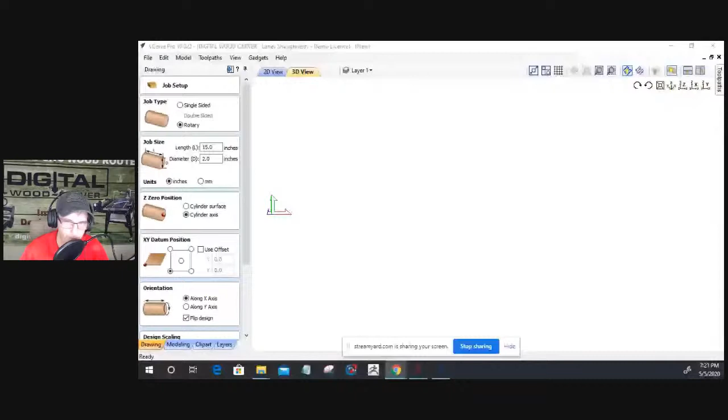Then we're going to actually transition into Aspire to make the project for this, because there's some modeling tools involved, some modeling involved in stuff.

Oh, I got the hiccups and I don't know why. Why did they start on me?

All right, so let's go ahead and click hide here. For this project here, of course, we're going to click rotary and let's get maximized up there. We're going to click rotary, we're going to do a rotary job.

On the rotary job, we're going to go with a 15-inch length, and I'm just going to make a small project. I cut a piece of walnut, 2 inches by 2 inches by 15. So we'll go 15, and on the diameter, the diameter of my blank is 2 inches by 2 inches.

But let me jump out of this for a second and see if I can illustrate this a little bit better, because this is important. If I were to draw a 2 by 2 block here, and if I were to true up a cylinder out of this 2 by 2...

If I were to say that my diameter was 2 inches by 2 inches, well what I would end up with is a flat here, here, here, and here. When it's truing up and rounding this up, I'm going to end up with 4 flats. It's not going to be a true round.

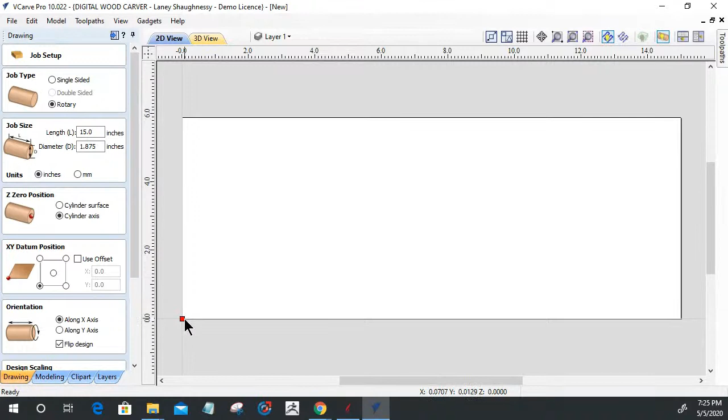Now, with the XY datum, we always zero out on the front edge of our cylinder stock, so it's the bottom left corner. For the setup, let me draw this out - 1.875 by 1.875, square for right now. Bear with me, hang tight, and you'll see where I'm getting at.

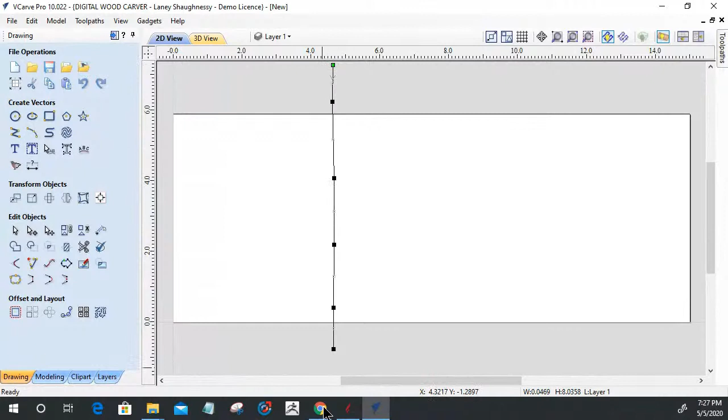If I were to take this and unwrap it into this flat drawing area, that piece would be split right on one of the faces, right in the center, and unwrapped in a fashion like this - let me illustrate. You go there, stop, you go here, and let's grab these and move them down here. Pretend along with me - grab this and wrap it up here. So when you unwrap that cylinder into a flat plane, it's basically taking it from the side of that block. Let's get that back together here.

On our digital wood carver units, for most of you, your fourth axis may be mounted on the table, with your router overhead. Let me draw a router here to simulate this. I'm going to select all these and center them up, then hit G on my keyboard to group those together. So let's pretend this is our router. When you center your router over your stock, you're centering it over the center of your piece, and the router stays at that orientation, traveling back and forth as the fourth axis part rotates, depending on what needs to be done.

Similarly, with the digital wood carver, our unit is mounted off to the side. So our Y axis, which is the router up and down when in fourth axis mode, we would center that bit onto the center of our stock, our flat. That's a representation of this lower left hand corner, because if I were to wrap this up into a cube, this seam and this seam up here would meet in the middle here. And that's our A axis.

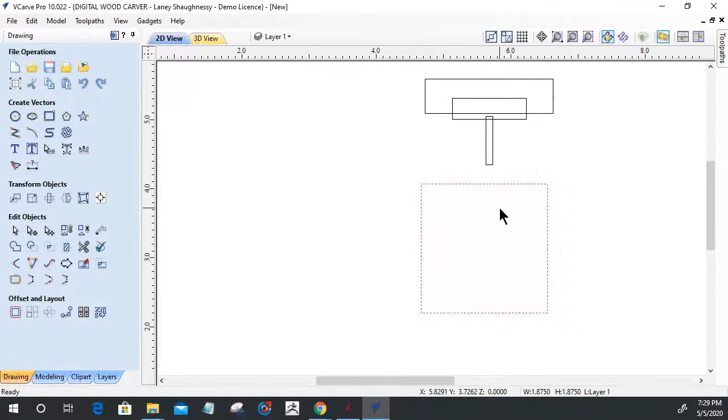So when we Y0 - keep this in mind, whether you are off to the side like the digital wood carver, or overhead, your Y0 is the flat face facing the router bit. It's not a corner or anything like that, the flat face. Same thing for the digital wood carver folks - that flat face facing the bit, nice and parallel, perpendicular to the table, 90 degrees to the unit table. That is Y0. And then X0 is at the leading end of your stock. You guys and girls with me on that so far?

You good? All right, now let's get back to our job setup here. We want to zero off on the bottom left corner. That means all the way towards the head end of our material and at the center of that block or round part or whatever you got.

Now, for the orientation, on the digital wood carver, we wrap our y-axis along our x - and I believe Dave Gatton does as well. His router is overhead, and he changes his y-axis from the router moving side to side to the rotary, so therefore he wraps the y value around the x. Same thing we do with our digital wood carvers. This is the option to use. Now, some machines where the fourth axis might go along the y-axis, and their y-axis travels back and forth along the cylinder, and their x is what turns the cylinder - then they would wrap the x values along the y-axis.

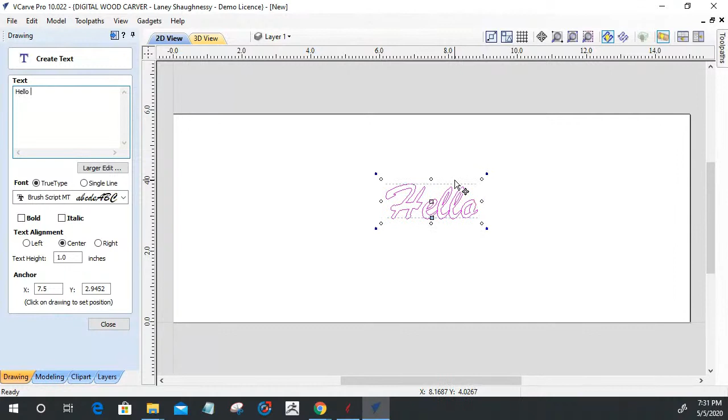So whether we were V carving something in our cylinder, let's say I was saying hello world. Let's weld that because we got overlapping lines, right? We don't want that. So we're going to weld that together and replace it with our nice welded text.

But if I were carving this, let's do a VCarve toolpath, 0 flat depth, 60-degree V-bit. Very simply calculate it. Let's unwrap this so it looks like our flat plane here for a second. If I wrap this cylinder up, it's wrapping that Y value up and down, and that's hard to make the mouse go around this white block, but imagine it's going around this white block. We would wrap it around that X axis.

All right, let my mouse stop there. Let that regenerate. Catch up to me, Vectric, so we can just move along nice and smooth.

Now, the same goes for if I had this turned 90 degrees. I'm going to undo that, and go Control C, Control V to make a copy, then rotate that 90 degrees so that I can size it down. Let's say that I was having it wrap around the cylinder, and if I were to V-carve that, calculate.

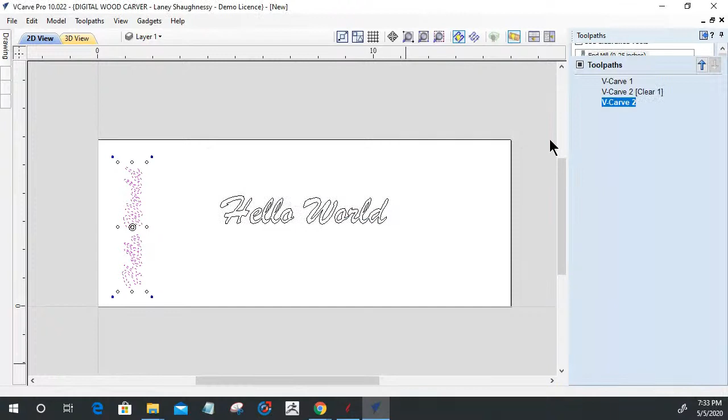Oh, I had an end mill in there. It shouldn't have been in there. If I were to wrap that around, so in our flat plane, it wraps around.

Let this regenerate. Catch up to me, Vectric. You can do it. Every time you move a wrap job, it takes a second for it to regenerate. But now, as I rotate, I'll use these two icons up here. As I rotate the part, that hello world is getting wrapped around the cylinder.

So if I were to unwrap this, it looks like that, but it's wrapping around.

So when we're doing cool things like this, which I'm not doing tonight, we might do a project on it. Somebody had asked a long time ago about making a kind of design relief, like a rolling pin for the kitchen that has little designs on it. When you roll it over dough, it cuts out those designs, like a little cookie cutter. I've made holiday ones in the past, and we might do a project like that one day when we circle back around to the fourth axis. But we're not doing that tonight.

Whatever design or process we're doing, whatever we carve is going to get wrapped around that cylinder.

Now, same thing with models, okay? Let's say that I had a cylinder here and I wanted to just go to my clip art gallery, and see what we've got as soon as Vectric catches up with me. Let's say we throw the duck on here, the flying duck.

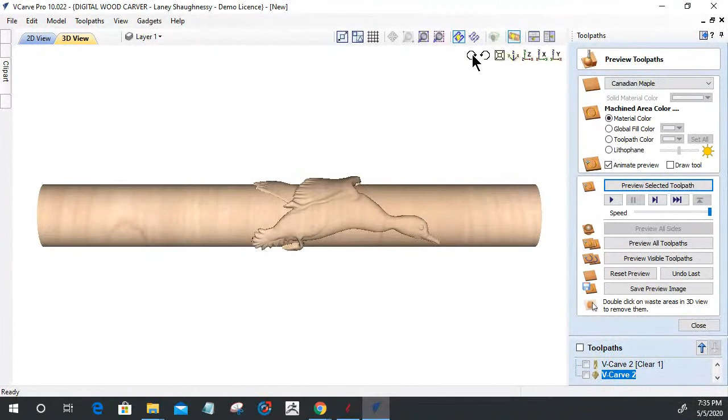Regenerate for me there, duck, duck, goose. It takes a second for all the pixels to catch up to regenerate. There we go, it'd be wrapping that duck around that fourth axis. So it's wrapping it around that fourth axis.

So we could make all kinds of cool stuff, little totem poles or whatever the case may be. They don't have to necessarily be little, but we would do that and everything. So whether we're working with a model that's going to be carved around our cylinder, you got to make sure the model's got height to it, right?

So you got to make sure your cylinder thickness can accommodate the height of that model, or else you end up with little pencil stick thin results.

Here, I'll give you an example. Let's say that my material setup here was not 1.875, let's say it was 1 inch in diameter and everything. Click OK on that and let it regenerate. Let's say that I wrap that around - I'm going to have a little hole pencil thin. Let's close out of this and turn off this. I'd have a little pencil thick, 1 inch diameter, because part of that 1 inch is my model, not just the diameter of the cylinder in the middle, but the dowel, if you want to call it that, but the model too.

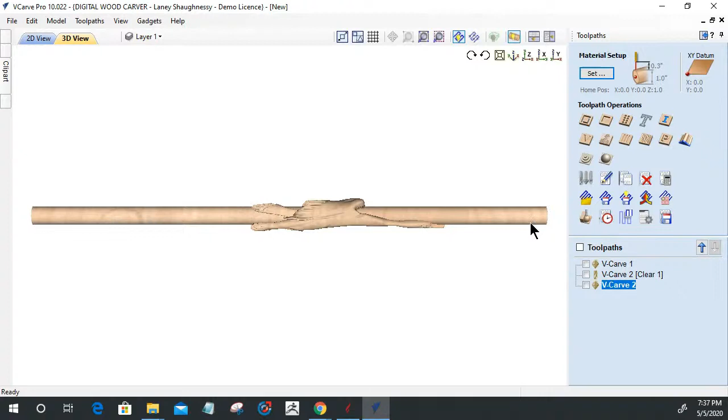So from the highest point of the model to the center is going to be half that diameter. So you got to make sure your stock is big enough, because, man, unless you're making a Harry Potter wand or something, I don't know what this would be for - it wouldn't be for anything. But you want to make sure that your stock diameter can accommodate the model, right?

Now I'm going to be bringing in - let's get back to our job setup here, and let's change this back to the 1.875. And I'm going to actually be bringing in a third party model file into VCarve Pro. Now, in VCarve Pro, I can't create a model from scratch, but I can import models from the clip art gallery, or I can import a third party model file into my project, and that's what I want to do - import a model into here, so let's go do that.

So we're going to go into the modeling tab. We're going to go import model or 3D component, and I'm going to grab this one 3D object here and let it import in.

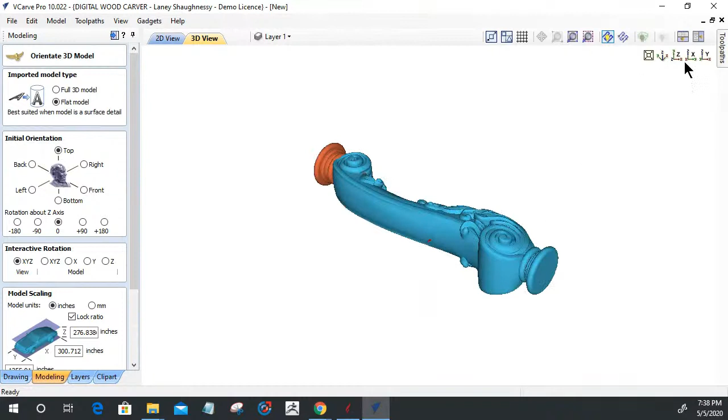Now, when you import a 3D model into the software, I don't know if you can see that little red speck right here that my mouse is circling around - well, that's my material. This is the model. That little speck is my material, right?

Well, if we look at our model here, we're going to be bringing in the full 3D model. Okay, and now if we look at this blue outline here, this is basically outlining a cylinder, like this model inside of a cylinder. However, that little red speck right there in the middle of the cylinder, that's my project piece, right?

So I need to first of all initially orientate the model, because this particular model, if I were to be looking at it here, it might have come into the software facing this way - it could be facing this way, right? So it's like I got this big old wheel of a cylinder that I'm going to be carving this leg sideways out of, which would not do. It could come in any way - it all depends on how the creator created it, right?

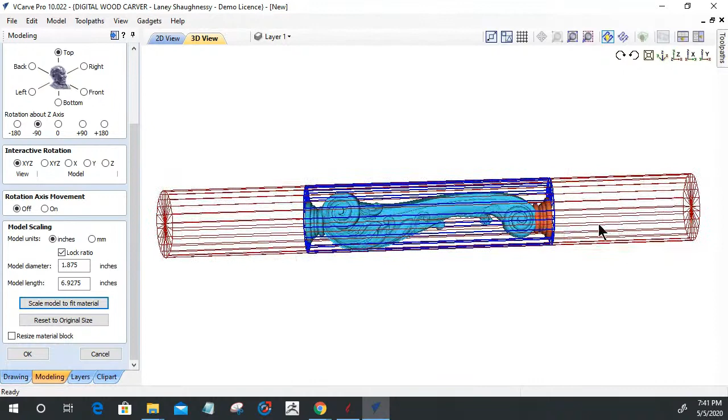So if I wanted a full 15-inch leg, I'm going to have to jack up the diameter of my stock. There's no ifs, ands, or buts about it - I'm just gonna have to do it. I could probably stretch this out. So let's see here, model length.

If I said 15 inches, let it regenerate that, and it's keeping the aspect ratio. So as I zoom that in, now I need at least a 4.5 inch diameter piece of stock, 4 1/4 is fine too, but I need that to fit this model and all.

If I would have reset the original size and then scale model to fit material, so it scales it appropriately down. If I would have unlocked the aspect ratio and made this 15 inches, well, that table leg is going to get distorted to accommodate for that, and that distortion may not be appropriate for what we want. So it's very important that you gauge what you're carving based on the size of the material.

So let's reset that size to original, get it back to its original size, and then scale model to fit material. And then, since I am working with a 2x2 here, I'm actually going to resize my material block. So I'm going to check off that box to resize my material block for that piece of material. When I click OK, it'll do that automatically.

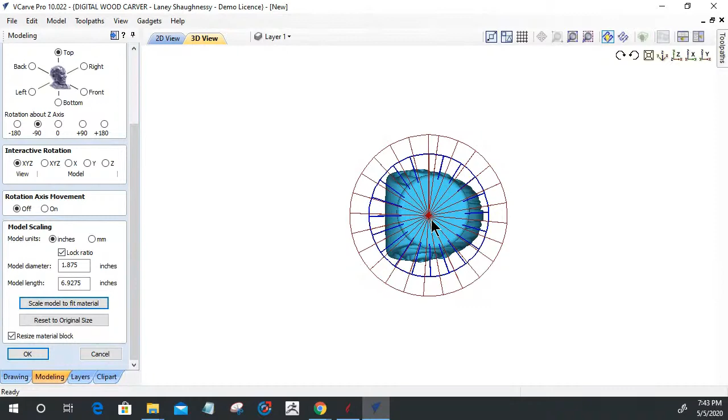And sometimes, whether it's this end or the other end, let me flip this around to the other end, spin around there. We may need to adjust center on our cylinder, because that center axis, there's a red line.

There's a virtual red bar running through here, and let's get back into a Z orientation, kind of looking down here. And if I rotate this interactively, I'll go interactive along the Z axis.

I could pivot this part, right? So here's that virtual red center, right? That's our center of our cylinder right there. Well, sometimes parts come in funky, so it's up to us to make sure that we get them centered appropriately. And this wouldn't be centered appropriately, right?

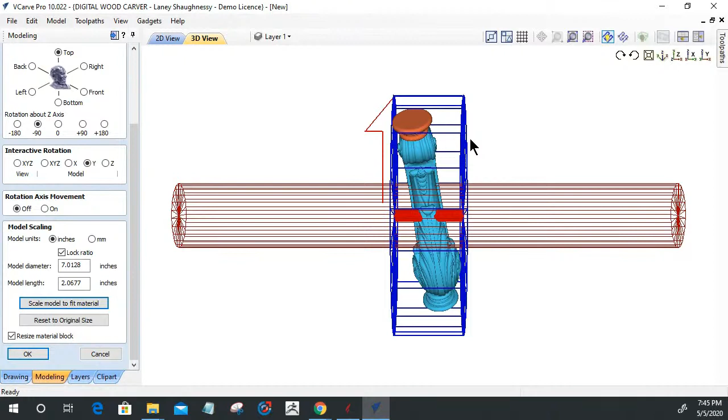So we need to do this interactively. Z is kind of this up and down pivot, so I'm just kind of pivoting it within this cylinder of the stock. Y rotation allows me to swing this thing around - right now I'm going diagonal because I'm not in an orientation. And then X is a rotation.

Okay, so let's get back to our Z orientation here, and let's basically get back to our original size. Get back into a top view for a second - I'm bringing it back to its original state and scaling to fit the material.

Let's talk about this Z. So let's say that my model was not quite centered - well, it's up to me to appropriately fix that. I'm just dragging my mouse up... I went too far, I overshot it, but I want to try to do my best to center the piece.

Now I can change my angle. So if I look at it from the X axis here, as I'm moving that Z, my mouse up and down, I'm pivoting that piece on its center axis. Oh, I'm sorry, I'm going the wrong direction - left and right. So it's my goal to get that center virtual line running down the center. I want to move this to the right, left and right. I don't know why I was going up and down a minute ago, but I want to get that the best I can to center.

Okay, and so now on the X, I might need to rotate the part. So the X is rotating - are you going to turn for me there, dude, so I can show them? If I move my mouse to that left or right orientation, now I'm kind of rotating the part inside that center.

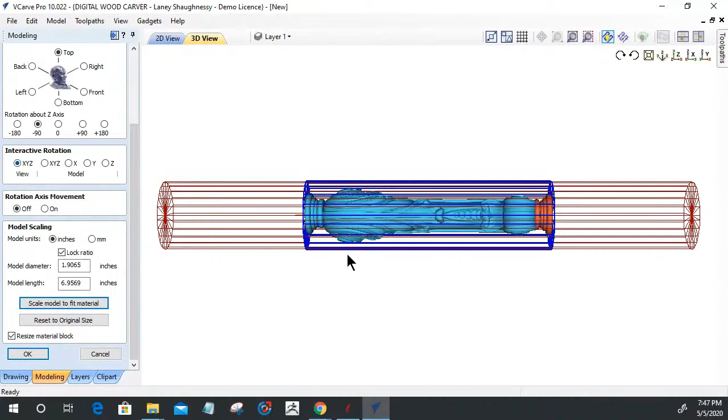Now, if I were to get out of interactive, I go back to view here. If I were to rotate this around, what my goal is, last time I'll say this, is to make sure that I'm centered. Now, if you see that red, let me see if I can zoom into that.

You see that red right here? That's my cylinder center, right? So I'm not appropriate because when this thing mills away, remember, I got a live center in each edge. So when this mills away, we're going to be a little shy on this end.

So what I need to do is get this set up, and it's kind of weird how we have to orientate this. I need to come in on my Z axis rotation, look at it down the X axis. I want to rotate it 180 degrees around, so I've got to actually do that manually.

Oh Lord have mercy, see what happens when you're interactive, it's rotating on that. I wanted to rotate the view around, not the actual Z. So let's get this set back up appropriately here.

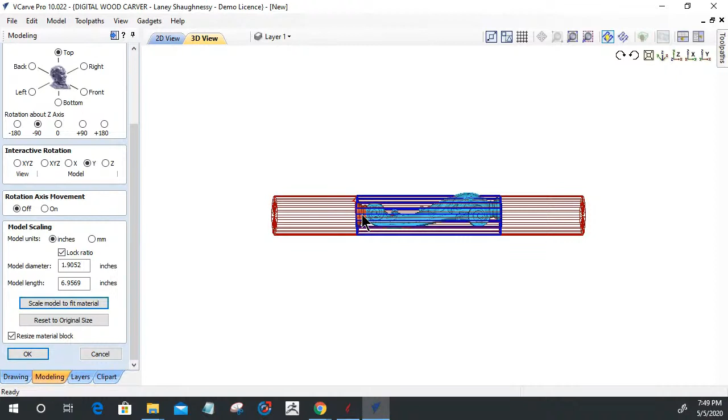I'm pretty much centered there, but now I need to bring it down to the center here. So on my Y... oops, overshot a little bit, right about there. Stop. All right, and so I've got my two ends centered.

Oh dadgummit, I just don't move. You gotta not click your mouse in the screen if you're still in the interactive stage. So let me get this back up where it belongs. All right, now get out of that interactive state there.

Fairly centered on that end. Let's look how we're doing on the other end. Pretty good there as far as the center goes. And right, if we go in here, we see a little bit of our red rod.

That's because this leg curves inward, and there's nothing we can do about that. It's just there's nothing we can do. So we're going to resize the material block.

Let's get back into a Z orientation. We got it orientated properly. And we're going to go ahead and click OK, and that's going to bring our model in.

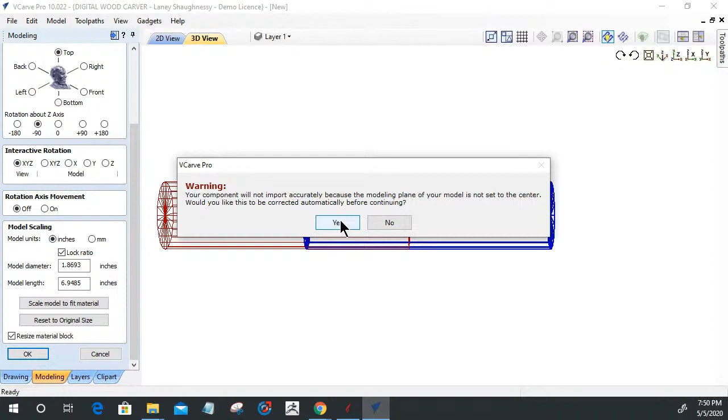Now what's going to happen is when it brings it in, because I'm resizing the material block, it's going to resize. Your component will not import accurately because the modeling plane of your model is not set to the center. Would you like to correct this automatically before continuing? Yes, I would. Set it for me on the center and click no because I have toolpaths in there.

And that's an unwrapped view. Let's wrap this bad boy up here for a second. But the software realized that I wasn't quite centered on my axis, so it said, hey, you want us to do it automatically for you, get you squared away? I'm like, sure, why not.

All right, so it did. It brought it in and it centered it for me and everything on that new size. Now this is our table leg. Imagine that rod running right through the middle here, right at this dip here. Part of that rod is going to be coming through to the center here because this end here is offset.

from this one. So if I come into kind of a Z view straight up and down, and if I were to rotate this to its side a little bit more, you can see that my center line here and the center here is off center. It's off, so you would see part of that red coming through and everything, and that's appropriate. So center to center, you just gotta - it's all about the orientation when you're bringing the models in and everything.

Now this is a wrapped view. Let's unwrap the view and look at what it looks like in a flat view that we're kind of creating the toolpath. Here's our 2D view, a little grayscale image, right? 3D view, it's our flat plane.

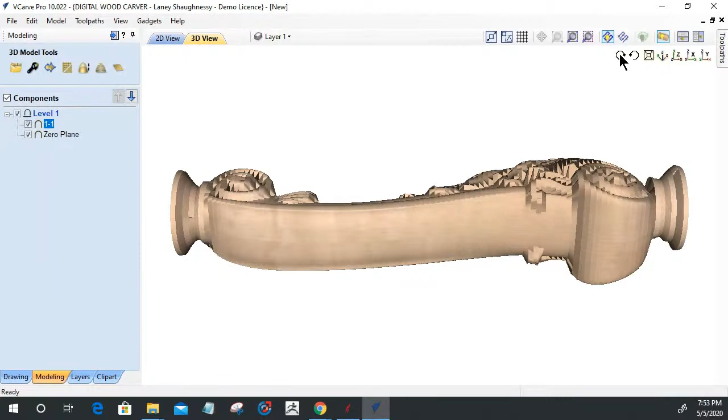Remember, like I said, our red shaft was showing, so it's all hollow up here. But on the back side, when this is wrapped, there's a seam on this. And if we turn this, I'll show you where the seam is. So let's come back here. That's the front. Let's go all the way around, all the way around, all the way around.

See if my seam's on... I think it's on the other side, and I just zipped right past it here. Bear with me a second. It is, because I'm a goofball. Let's get back around there.

There we go, barely see it, but there's our seam. That's where our two ends come together to form this seam right down the middle. You can see a little bit of it right about here and everything.

It's all about how you orientate the model. Whether I'm doing a 3D model like this, or taking a piece of clip art and wrapping it around my cylinder, or engraving on a pin with V carving, it's all wrapping. We are wrapping these models in a 360-degree orientation. We draw in a flat orientation, but we're wrapping that Y value - remember, up and down is Y - around that X. When it wraps around, it creates that cylinder.

Now, if I were 3D carving this model, once everything is laid out and positioned and ready to go, and it looks good in the flat view - I don't want to carve any V carving over here, but I could carve some text on the back of this leg if I wanted to - I'm ready to start creating some tool paths.

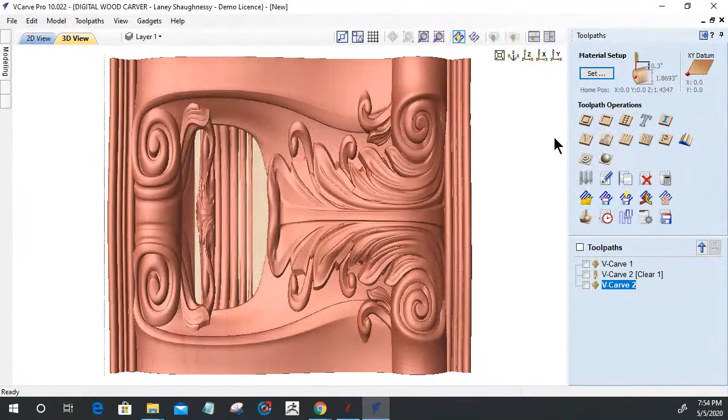Now, in the tool paths, let me delete these three so we don't get confused with those hello world toolpaths I made earlier. When we're working with a 3D model, just like if it was a flat board, we have 3D rough and 3D finish - our two toolpaths.

If I had a 2D toolpath, such as a V-carve of a graphic image wrapped on a cylinder, and I was carving hello world on these flat areas or anywhere on this model, it's very important when I calculate this 2D toolpath that I project the toolpath onto the 3D model. I check that before I click calculate, because we need the carving to flow with the curves of the model.

There's nothing really scientific about the fourth axis. It's all in the setup - how to zero out your machine in the fourth axis and bring it in. Where it gets fun is when we actually have the ability to create models from scratch and things like that.

A lot of people with that fourth axis want that ability, and I make table legs - I go on eBay, Etsy, Turbo Squid. There's all kinds of places to get 3D models of table legs. eBay is a great place to find unique table legs and balusters and all kinds of things. That's where this model happened to come from. I can bring these models in, calculate the toolpaths, and carve them all day long.

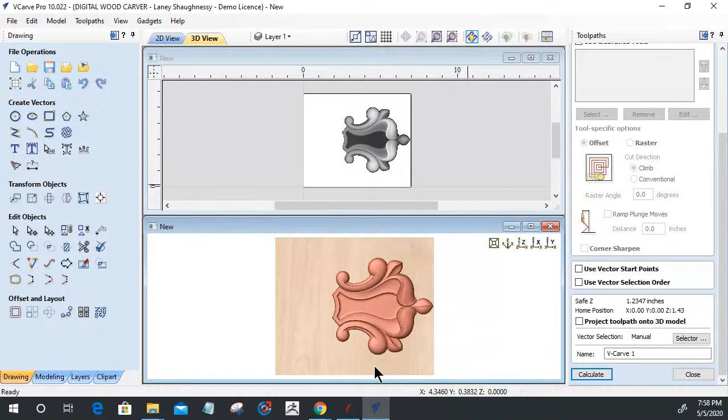And of course I hit rotate, grab the right blocks there, the white block sizer. Let's get that sized about like that, and get this pulled up here. Then I'm going to go into my drawing tools and align up and down, center, get it centered. So from there, let's split our view so we can see what's happening here. Let's go into our clip art and see what else we've got.

Let's say that we want to throw this in there. And let's hit the number 9 key twice. Excuse me, go back to our drawing tab and align that to center.

All right, cool beans. Now I want these two models to interact. I want them to merge, so they're merging with one another, right? Just like they are. If I were to click in here, it merges with that.

All right, let's go into our clip art. Let's see what else we got here. Let's grab this bad boy.

You can drag them into 2D or 3D view. All right, let's go ahead and hit number 9 on the keyboard.

Let's rotate him. Actually, I want to keep going all the way around. I want the small end at the bottom. You're going to hear these dinging sounds because the model's got to catch up to itself before you can rotate. So let's get that one more time. There we go.

And let's size this model down appropriately. I'm actually going to take this model here and squish it a little bit, so we're going to squish that in.

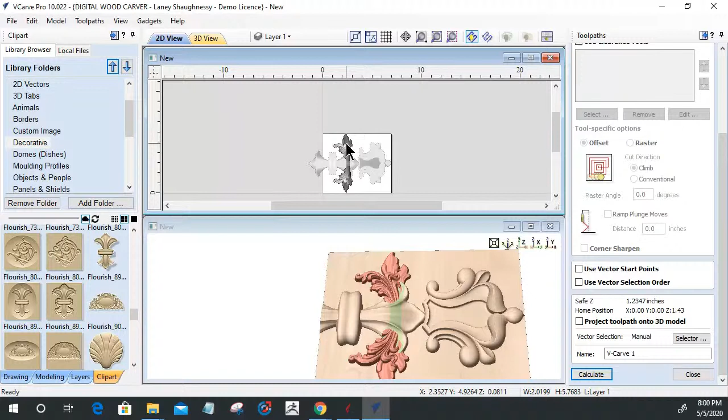I'm going to grab this flourish, pull him up, get him in there. And this guy, let's squish him in a little bit, because I've only got a 15-inch piece. And I'm just using this as an example.

All righty, Aphrodite. Now let's maximize this. And so let's say that I wrap this up, right? Nothing there, right? It's all squished. It's like, well, wait a minute, what in the heck happened there?

Well, you can't just throw models on a flat plane that has no thickness to it. We need our stock underneath, and that's a zero plane. So in our modeling toolpath here, we have a zero plane with no height to it, but we need to add some height to it. So in our zero plane, we need to give that diameter, that meat.

So currently, as it stands, with my three flourishes, my zero plane has no base height to it right now. So if I look at my overall model height, let's maximize this out. You see how it's all skinny? That's why it wrapped up.

So I'm going to pull this up and pull this out. I want the model on the outside of my zero plane. I want it on the top of it, if you will. I want it wrapping around that zero plane. This zero plane is going to wrap around like a...

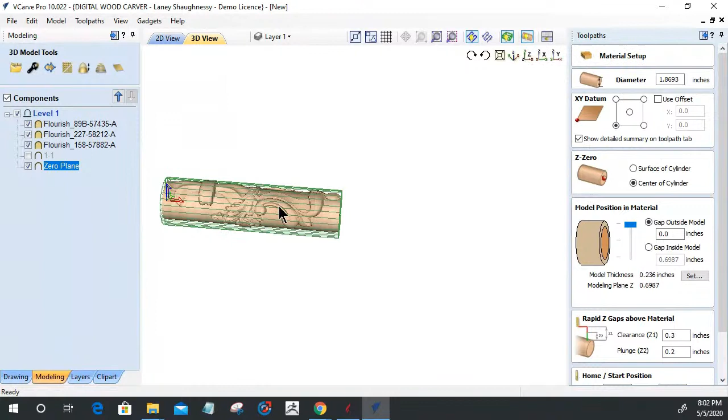Let's get this in the middle of the screen. Work with me there. Come on over here. Come on, come on. All right, let's drag it over. So we need that model to wrap around that cylinder and everything.

And so right now, my current model thickness, not my Z plane, but my model thickness, is 0.236. That's these guys here, all these models I just dropped in there. The highest, from the bottom to the highest part, is 0.236. Now with the Z plane and everything, that toilet paper roll, not counting the hollow center, it's 0.6987, for a total of 1.8693.

So it kind of built up the diameter that I'm going to need for this model. But you know what, my stock is 1.875. So I've got to change it.

I've got to come in here and go, all right, so 1.8693, this number here, minus... no, I'm sorry, minus 1.875 equals...

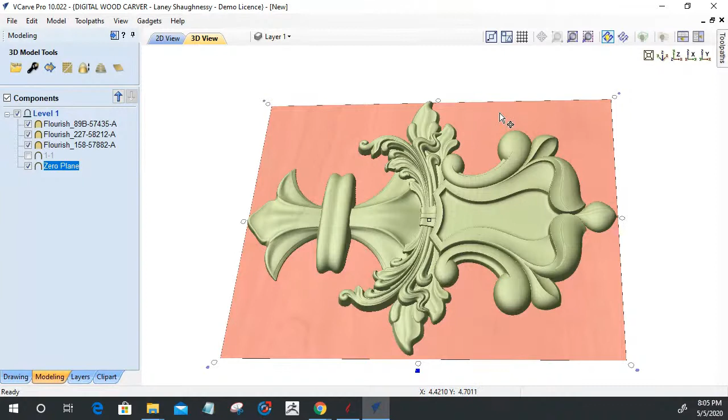Let's get back into full view here and unwrap this bad boy. So now we've got our appropriately sized model, and I could build any kind of model that I wanted to create, some kind of unique spindle or table leg or whatever, whatever rotary axis and everything. And so this would all wrap around and it would look probably pretty cool, you know?

And the thing of it is, in here I can't build the model in a way that would allow me to remove some material. I can't remove material like I can in Aspire. In Aspire, I'd be able to draw a vector around these models and say remove everything that is outside of that model, and it would remove all this model material of my cylinder here, giving me the opportunity to kind of form and build something like that corbel leg we saw at first. So if I turn this cylinder off for a second...

Turn all that off, come on. And turn the zero plane off, don't need a zero plane when we have a table leg and all. And now on this guy right here, it's like, man, he got fat, just eating his cake, right?

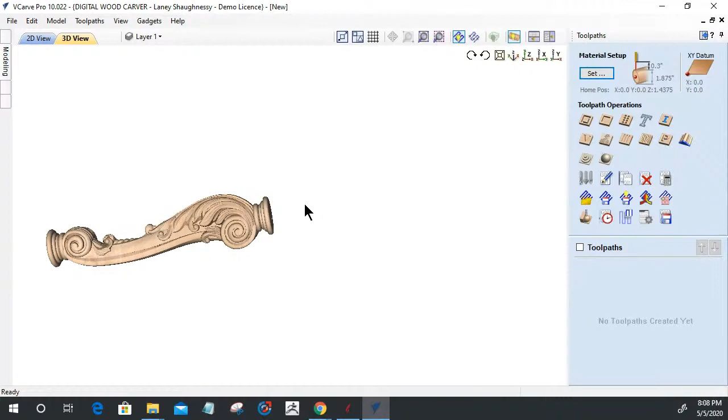These negative sides here, where we're below our center line, that material would have to be removed, and I just don't have the ability to kind of sculpt and do that in VCarve Pro. But man, I don't really need that ability. There's so many different models I can bring in and work with, the sky's the limit. But for those of you that have Desktop and Pro, you can do everything I've been doing here: bring in models, V-carve, create little patterns for cookie cutters and things like that. But if you want the ability, aside from dropping in models and creating your own cylinder, to sculpt your own leg or profile, that would be an Aspire thing. I'm not saying run out and buy Aspire tomorrow, I'm just saying you got to understand there's limitations on what you can and cannot do.

So let's say we were doing a cookie cutter pattern. Let's come in here, turn off all the models, get back to our blank board, front and center there. Let's get back into our drawing tab, close our alignment tool. Let's say I was doing a bunch of Christmas stars. So, 35, 35 — that star looks good to me.

All right, let's get a little bit of an array going here. I'm going to drag this down right about there, and use my array tool. I want 6 columns, let's go 12 rows, with a gap between point to point and point to point — let's go with a 3/8 inch, 0.375 inch gap. We don't want to waste too much dough, right? But let's click copy and see what we got there.

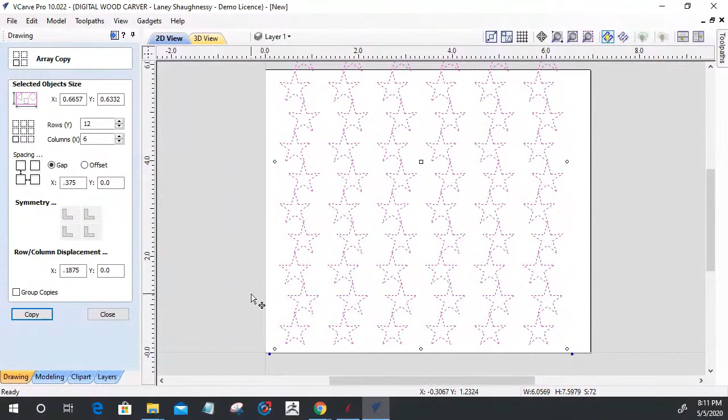I should just measure my star, but close enough. All right, so now I've got my pattern here, but these exceeded the 12 rows, exceeded that. So we'll go ahead and get rid of that. And then what I'm going to do is take this and center it onto my material.

If I want the stars to be pockets, where it kind of has the little stars raised in the dough, I would simply V-carve these with a flat depth. If I wanted to cut out the stars, I would need to do a reverse of this by putting a boundary around it. So we'll do a little bit of both.

So if I were to V-carve this, let's just do the stars first. V-carve, flat depth. I don't want a very deep depth because I don't want dough stuck up in my rolling pin that I have to pick out of all the stars and points. So we want a very shallow kind of depth, enough to make that impression, whatever it might be.

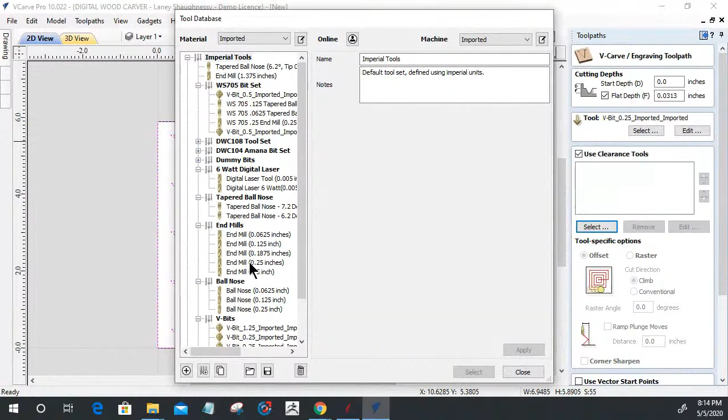And I would calculate that. If I reset this preview, let's unwrap this for a second and preview the visible toolpath. That's going to go around and carve all these stars where they're raised up. Think of raviolis and things like that. There's all kinds of little patterns you can find online that you can use.

But now, I didn't offset my rectangle, I didn't bring it all the way to the edge, so I have these little lips here, and that's no good because those lips will show up in my cutter. So I need to offset this outward a small amount. I'll go a 16th of an inch outward, delete the original, and then recalculate that toolpath one more time, because I need that bit to clean up those edges for me.

And that way, when I wrap this bad boy up, it's there, and now when I'm rolling this, it's making this indentation impression with all of these stars. So there's all kinds of cool patterns.

I think even, let's see, if I open up a tab, let's see how good Google is to us. If I were to type in... let's see, Christmas cookie cutter patterns. This is an example, it doesn't have to be Christmassy.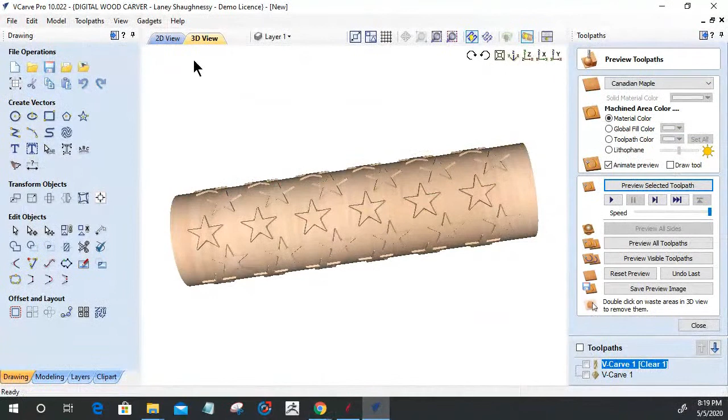Now I've spent enough time showing how you could create vectors. Of course this was just a little generic pattern, I just threw some stars in there, but you could have some fun making patterns. We could come in, in clip art, let's see here, texture area tiles. Let's see what we have under texture area. I don't think I have anything in my texture areas right now, probably not in my VCarve Pro, I'll show them to you in that. But sometimes your textures, and I don't have all the models that you guys and girls have, but there's all kinds of brick textures, all kinds of textures you might be able to use. Typically though you're kind of drawing them yourselves.

Now let's get into tonight's project. This was not tonight's project. Tonight's project, we are going to make a basket weave bowl kind of looking thing out of that big old slab of wood, so it's going to look something like that when it's all said and done. I'm going to show you how we make this from scratch.

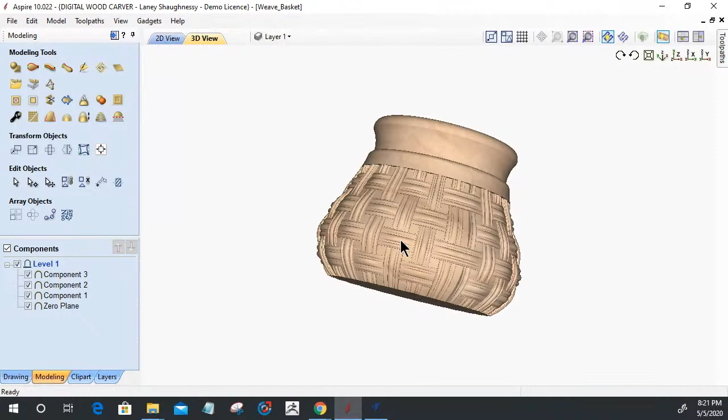Now I'm thinking about actually taking this and putting it on the bandsaw when it's done, cutting this part loose and making a lid that sits on top. Then if I cut this lid off at the bandsaw, this part right here should fit under my CNC so I could actually mill out some of the inside to hollow it out. If not, I'd have to be creative, I could use a Forstner bit and just hog out the waste material in there and do some fine sanding. I could use rotary tools, I could use all kinds of things. I could take it to a lathe and chuck it up, but I won't be able to hollow it out on the fourth axis - I'll have to hollow it out on the table, lathe, by hand, some way or another. So it's going to be a solid block that looks like this.

And then it'll get cut down. But I'm going to show you how we make this weave pattern, show you how to do weaving and all that stuff. So we are switching over to Aspire for this, okay? And for those of you that don't have Aspire, please stick with us, because learning how to draw vectors or create patterns and stuff, you might find it useful. So in this particular project here, let's go back to our job setup. This job setup is a rotary job, it's 4 3/4 inches in length.

Okay, that's because I'm chucking this bad boy up on its side like that. 4 3/4 - and look at the size of my hand, that's a big old chunk of wood right there. But 4 3/4 from one end to the other, and it's 6 inches by 6 inches. Notice I have 5 7/8, because when it gets rounded, the corners get knocked off. I'll get a 5 7/8 cylinder out of that.

Working from the cylinder center axis, bottom left corner, and wrapping along the X axis.

Ooh, that fell and it scared the Jesus out of me. Did you see me jump? Lord have mercy, almost shot somebody. You could see my hand right now - I wear a fanny pack appendix style, that's why it came in at me. You got to be quick on the draw. Anyway, scared the shit out of me. That's funny.

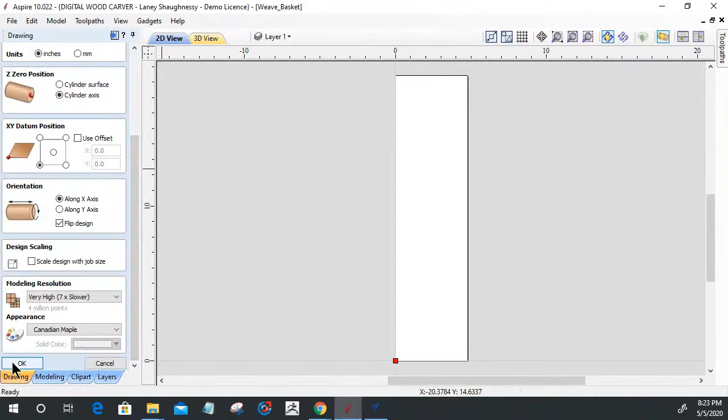Now you're going to see a series of vectors over here, and our material is actually here - there's nothing on it right now. But I have a series of vectors because I want to talk to you about weaving. Imagine a weave pattern, right? You have a series of whatever shape it's going to be - in this case I kind of simulated some rectangles here, and we'd have one part going over the other, almost simulated where one piece is going under and one is going over to create that basket weave. Hard to imagine when you're looking at a 2D vector, but imagine it.

If I were to trim this up to make it look like it was weaving right on here, I would do something like this. Let's see, this would go under, and so over, right? And then over, and then under, and then over. So you can start to see that weave coming in - over, under, over. Ha! I went over and over and over again.

Hold on a second, I gotta fix my weave. Draw a line from there to there, space bar to finish. From there to there, space bar to finish. And get back to our trim. Boom, boom, that kind of thing.

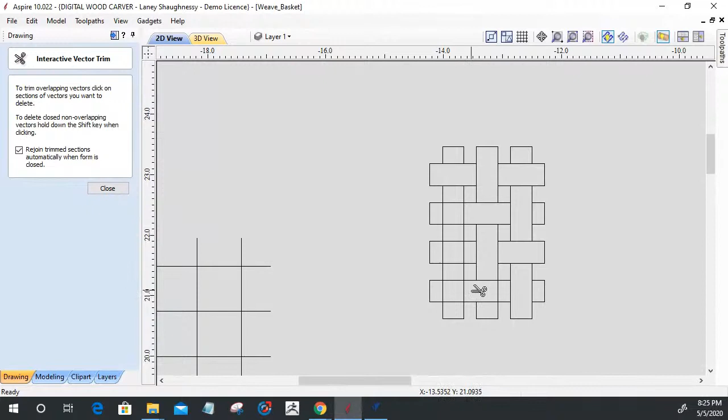Over, under, over, under, same thing. Now this guy's, this makes no sense, Laney. Hold on, let's undo that - I had it right the first time, I went the wrong way. From the top there, boys and girls - over, this one's under. Over - oops, wrong one. And this one's under - now we're getting somewhere, Laney, you're doing it now, buddy. Under, over, under, over.

So just by drawing those rectangles and doing some trimming, it kind of simulates that weaving pattern. You wanted to V-carve that, you could. We're going to be creating this kind of effect, but in a modeling form. All right, y'all thought that was pretty slick, didn't you? Okay, let's get back to it.

So we're gonna do a weave effect around our bowl, but first I gotta figure out what the bowl shape is gonna be. What I've done here is I created a profile - started off with not a polygon, I started off with a rectangle.

Let me do it over here on the board. The rectangle was the width, that 4 3/4 inches, by the radius of my diameter - half my diameter. So over here, 4 3/4 by 5.875 divided by 2 equals, click apply.

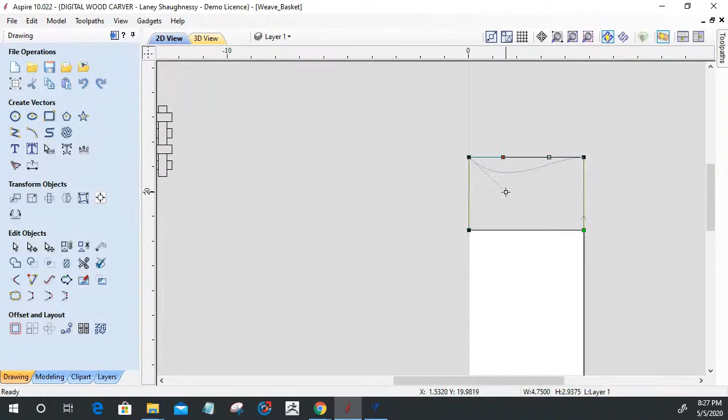Okay, get that in there. And then I was able to do some trimming, node editing, get rid of that bottom span - we don't use the bottom span. Wanted to take and turn this into a Bezier curve, pull this down, give this a little bit of a curve to it, go into the fillet tool - not 3/4, I want a 1/4 inch radius - and click on that, give that a little bit of a rounded edge there. Go back into node editing and play around with this curve a little bit more, get it kind of like a shallow neck a little bit, and pull this bubble out a little bit more.

And when it was all said and done, I have a profile now that can get swept along the edges of the material here to create what's called a two-rail sweep. It's a model tool in the Vectric software called a two-rail sweep.

Now, before I could sweep a profile, I need my rails. So I'm going to draw a line from the top of my material to the bottom, space bar to finish. Top to bottom, space bar to finish.

Now I'm going to go ahead and get pretty close, right? I'm going to use this profile here that I created earlier, pretty close, pretty similar in style and everything. But one of the things you'll notice is that this one, if I were to drag it over and snap it here, is significantly shorter than this one.

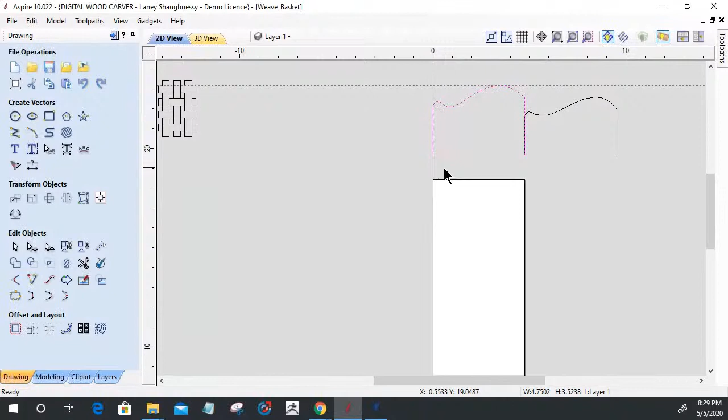Y'all with me? You with me? You with me? All right.

Right click, relative position. I want to go down 5.875 divided by 2 equals. Put a minus sign there because I want to go down. So when I click that, it's going to create that extra line there.

And then all I did was I went into node editing. Well, actually, I didn't go into node editing, I just drew a line, drew a line right straight across that guideline. Get rid of that guideline there so you can see it.

And let's move my actual profile I'm going to use out of the way. And then all I simply did was trim, trim, trim, and then pop back into node editing and simply delete that bottom line. We don't need it. And that's how I ended up with that shape.

And, you know, we're fairly close, don't do that. Don't do that when you're in node editing. We're fairly pretty close. My neck is a little different from the original to there, but same type of thingamajigger. So draw your profile, whatever shape you want.

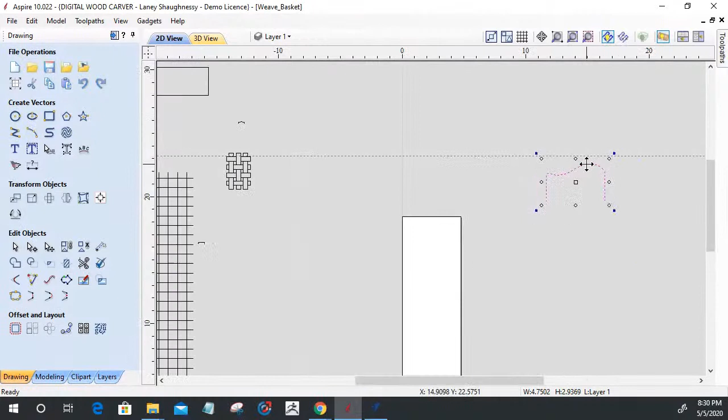And I want kind of this vessel type profile is what I want. So we'll drag that over here. All right, so I've got a profile, got 2 lines, 2 rails sweep.

Open up the 2 rail sweep tool. Select our profiles, this one first, this one second. That is our drive rails. Okay, make sure those arrows are facing the same direction.

If those arrows were not facing the same direction, it would twist the model. Twist it, you don't want to do that. So make sure their arrows are flowing in the same direction, since we want to sweep. All right, so that's my drive rails.

And then now I'm going to select my profile. Well, here, hold on a second. 1, 2, hold down that shift key there, boys. 1, 2, use selection. Then we're going to select the profile, no need to hold shift key or anything like that.

Just select your profile, and we're going to scale it, the cross sections with the width. So scale it with the width, and I already made my profile to match the width. And I want to sweep it between those 2 spans, between those 2 lines. We're going to go ahead and click apply and sweep it along.

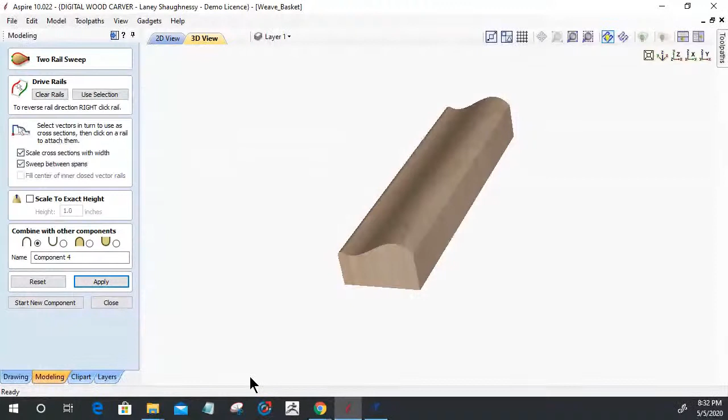rail, right? And if we were to wrap it up, we'd have our vessel. Just a very simple, plain vessel. Now I want this to kind of look like a little weaved basket on the bottom and all.

So I want to add some weave to it. Some weave and flow, weave and flow.

Now, when we're doing the weave and everything, we're going to basically be taking a profile that we draw and we're going to be sweeping it along a center rail. So I like to call it the one rail sweep, but the center rail, this tool allows us to take a profile and sweep it along a single rail, through the middle of a single rail. But we also have a function that we can actually weave multiple cross sections together, so multiple lines and patterns and stuff.

So let's go back to our drawing tool and let's see our pattern here. Now when I drew out this pattern, there was actually a reason for drawing out this pattern of rectangles before I created the weave, I wanted to kind of look at my spacing and everything, and imagine a center line running through each of these vectors. I wanted to get a spacing to see what size profile I needed to create. And what I ended up coming up with was this little guy right here.

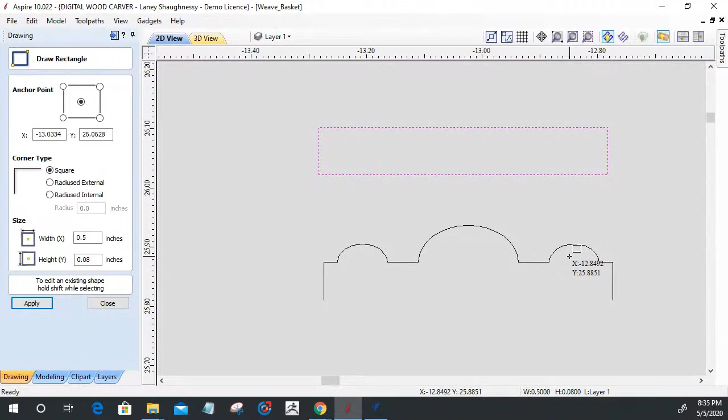And simply to make that, I drew a rectangle. Drew a rectangle, and on that rectangle I made it 0.5 inches wide. I didn't care about this number right now, I just created the rectangle to get it made, because I wanted an overall height of 1/8 of an inch when it was all said and done. But once I did that, then I came in and drew 3 circles.

I drew my center circle at an 1/8 inch diameter, and then I had an outer circle that was a 1/16 of an inch diameter. And what I did is I figured out where I wanted this outer circle. Then I took a line and in the center here, I just drew a line straight down, and that line allows me to flip this vector over to the other side, equal distance from the center.

So I can go into my mirror tool and create a mirror copy. If I select that object and this line, I can flip it about that line and get it equal distance on that side. Once I did that, I then came in with my scissor tool and trim, get rid of... let's zoom in here, trim that away, trim that away.

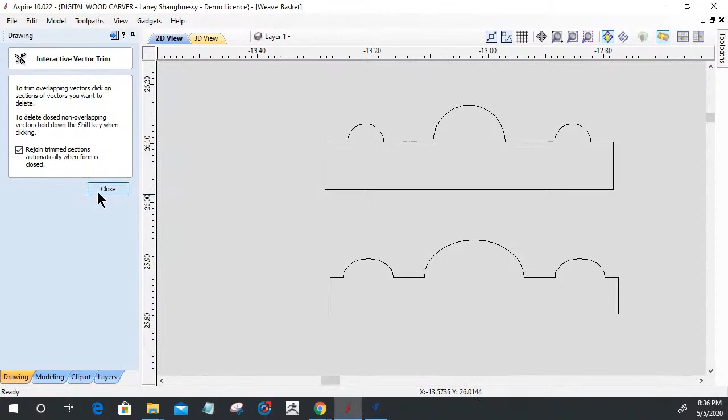Now I needed an overall height of 1/8 of an inch. So I came into my size tool and I kept my aspect ratio different, so instead of 1/2 inch, I unlinked the X and Y and changed this to 1/8 of an inch. Click apply.

And what that did was not only did it squish it down, but it gave me this little almost dome shape. This was slightly different, and it's all based on this overall height. If I were to squish this down even more, the more I squish it, the more domed it gets. It all depends on how big you want your beads.

But when it's all said and done, if I say I like the way that looks, then I need to come in here and get rid of that span right there, and get out of node editing. Then drag a guideline to the top of that, right click, make a relative guide 1/8 of an inch away, negative, because I'm going down, create.

Then I need to extend these out to this line here. I can simply use a line to help me extend, because if I draw a line there, now I have something to extend to, and I can use my extend tool and go boom, boom, boom, boom. Then I can get rid of that line, I only needed it to help me extend. So now I'm at 1/8 of an inch with my little dome shapes. And that's how I came up with this profile. Very simple enough, right?

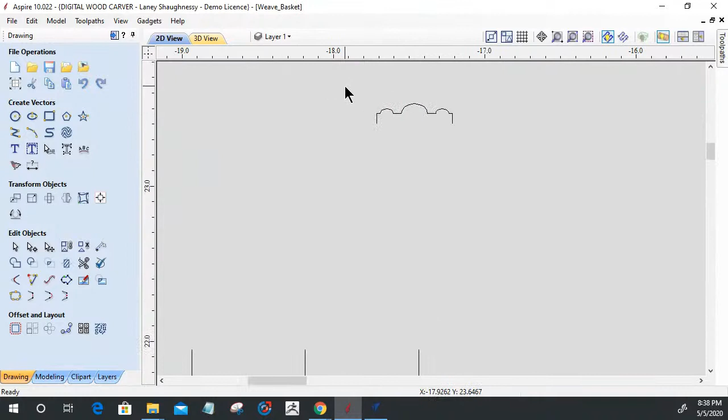Now that we have the profile, and this profile is bigger than my little square boxes here, my little simulation, I have to come up with spacing. So imagine on this profile a center line running down the middle of it.

Don't have to imagine because I just drew it right there. What I had going on here was I wanted to figure out what spacing I need based on the area that I wanted to cover with the weave. In that general area, what I came up with is from the bottom edge, it's going to be a half inch in to the center of the first weave, then from center to center 3/4 of an inch apart, and then another half inch to the top part. That's what gave me my guidelines here.

I drew the lines based on the center because we're sweeping across the center, and I stretched them out all the way to the length of the material. Then I drew a line based on that similar spacing, and ended up just offsetting all the way across. I wanted to end up with equal spacing on the top and the bottom just to create this kind of grid here. Now you'll notice there's another line way out here all by itself.

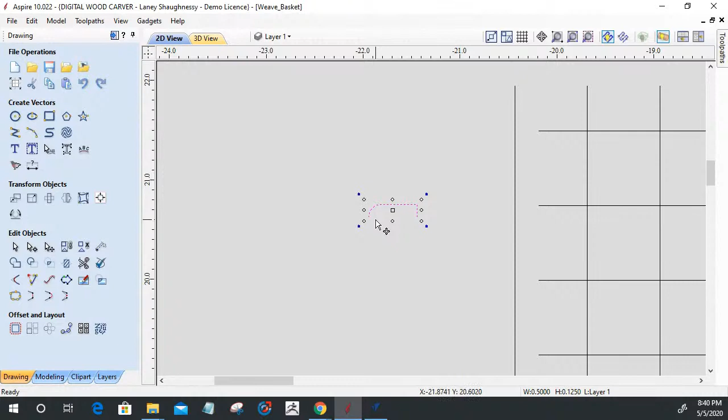Well, that line is for this little profile here. This little profile is a rectangle, bottom cut out with a little radius fillet on this end, to create a little cap that, when the weave is carved on, it's hard to show like this, but imagine it's going to cap off these weaves here on the verticals and all. So this little profile will get swept there.

All right, now we need to put it all into motion, into place. So I'm going to grab all these vectors. Okay, let's do this again. Get in the middle of the screen there, Hoss. Grab all these vectors.

I'm going to snap the bottom to this edge and the top to that edge. That's going to be my little profiles I'm going to sweep here. Let's get rid of that little line in the middle. I'm going to use these two profiles with my single rail sweep tool to create my weave. Weave and bob, weave and bob.

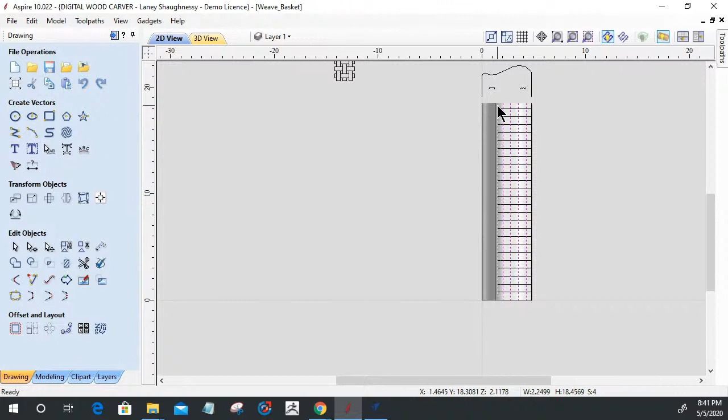All right, so here's how we do this. We're going to select our lines 1, 2, 3, 4. Then I'm going to use the power of the mouse, draw a box right to left, hold down that shift key and select all of them so it selects them all. All right, I got all my weaves here.

Now, if I go into that modeling tool and open that single rail sweep, I like to call it the center line vector tool, that's going to be my selection. What I have selected is my drive rails, so you'll see all the green nodes, all the little starts and everything. Now, my pattern that I want to weave, or braid, crisscross if you will, is going to be this vector here. I don't need sharp corners; I want to sweep it between the spans.

If I were to click apply here, let's go into our 3D view, let's unwrap this. Okay, it would create this grid, right? Nothing sexy about that at all, it's just a funky grid. Well, I need this to weave. I need all of those different profiles to weave under and over, under and over, and under and over.

So we have a very cool tool here called Weave Under and Over at the crossings. I'm going to select this, and on my Z, I'm going to set Z under to be 0. And my Z over, I want to go, when it goes over, I need to go over by 100% of that little profile, 100% over. So I'm going to go 100% and click apply.

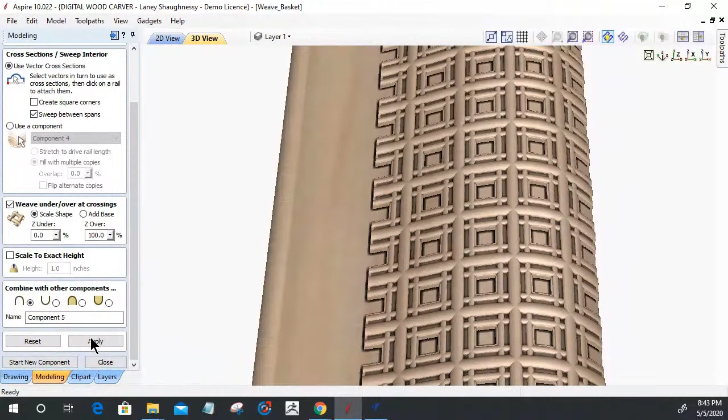And so there's our pattern. Now, what does the over, under, 50%, 30%, all that stuff take and mean?

If I were to adjust this, let's say I went 50%, then my parts... if I went 50%, it always got to be 100 on the over. Basically, it's cutting halfway through, right? It's not going 100% under, it's kind of going 50%. Even though the top one is going 100% over, the bottom one is going 50% under. So you would change your ratio however you need.

Now, I'm doing scale the shape, right? I could say, well, I want to keep the shape, I don't want it to, like if I go 0 and click apply, watch how the shape, when it regenerates, starts to flatten out, it's getting flatter as it goes under and then bulges up. So it's flattening out. Well, I could have done add base to that instead of scale shape. I could add base where it just adds meat for the over under. It keeps my shape the same, but it adds meat, adds base underneath to get it to raise over, and it kind of blends them together.

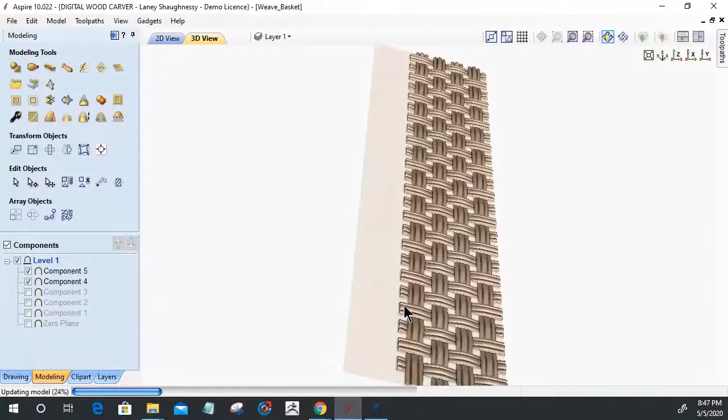I'd want to add a 0 plane to that, so it kind of fills in, but I could do a weave of that sort. Now, in the case of this, turn that off. My weave is actually following the shape that's underneath it. It's being added to the shape underneath it, and that shape is my vase, my vessel, whatever the case may be. So it's kind of giving that weave basket look.

All right, now I don't want these ends just dead ending like this. I want to cap them off some way. Brings us back to our drawing here. So I decided to create a profile that when it caps them off, it'll square off and cap off at the end, and then it'll just kind of round into my neck, my shallow area here and all. And so again, this was my drive rail. This was my profile. So again, that single rail sweep tool.

This is my drive rail. That's my selection. This is my profile, and I want to sweep it. It's not really between spans, but I want to sweep it along that span. And click apply, and it'll sweep that profile. Now, if we go into the 3D view here, basically what that does is, let's get to the end here, let it regenerate, it creates this end cap that kind of floods into this, just rolls over into the neck of that model area. So it creates that end cap.

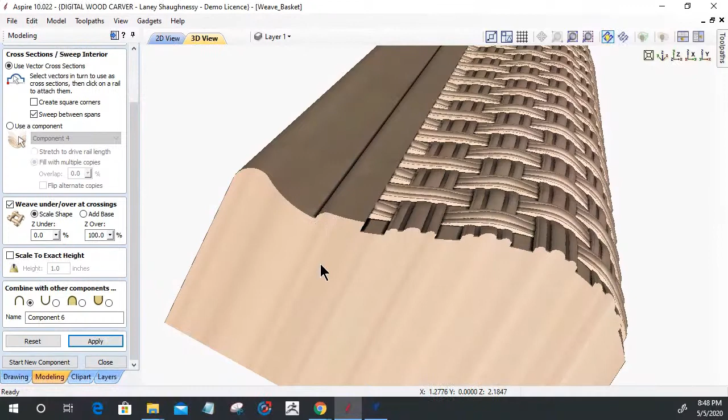That's all it does. Now, when I wrap this up into my cylinder, it looks like this. Let it regenerate. And let me zoom in a little closer and let it regenerate. Almost there. There we go. And so I've got the weave pattern, and then it's a nice clean rim.

And when I created that, it made me think, which I didn't have the intention to, but it made me think, man, okay, I'm gonna cut that off and create a bit of a lid, if you will. A lid where it just kind of sits on there, and then I'd have to run it through the bandsaw and create a lid on that. And I could be a little bit more decorative. I could flare this end out a little bit more, or whatever, depending, to make it look more like a stopper or whatever. But I was happy with this shape for what it's going to be cut out of.

Okay, and so if you're ever interested in making weaves and you've got Aspire and you're trying to figure that out, it's the single rail sweep tool.

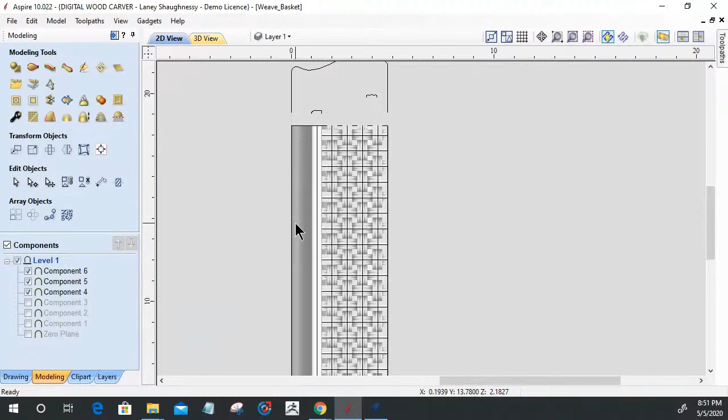Basically, I laid out my vectors, created my profiles, and through a matter of sweeping on a two rail sweep and then a single rail sweep, I was able to sweep those patterns across to end up with what we've got.

Now, for those of you interested in V carving and making a faux weave pattern, you could just do like I did. I just drew rectangles and trimmed up your vectors.

They're open vectors, right? You would have to close them off to create that simulated weave. So what I mean by closing them off - this is an open vector, right? We cut away these lines, so it's open, and you've got to close it off.

So that's the join tool for those of you who are curious. Join tool down here, join with a straight line, just to close that off, right? Same thing with this one, join with a straight line, and you'd have to go through each of those and join with a straight line and close them up.

Then you would probably want a little bit of space, not much - I'm going to hold down the control key so it's micro movements, using the arrow keys and my control key. I'm holding it down and just creating a little space so there's not that overlap. Got one here - that little micro space.

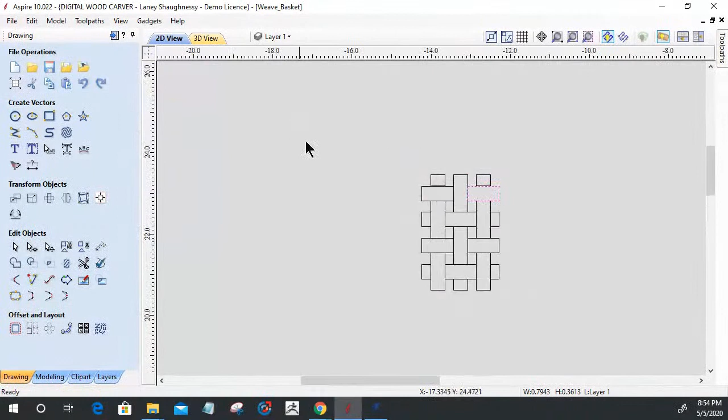Carve this as an example - VCarve, our toolpath. Hold on a second, bear with me a second. I would need a boundary around it. Give me a second. Wasn't quite a VCarve toolpath - profile cut would have done the same thing, but let me get this sized appropriately.

And then I'm going to make it just a little bit bigger all the way around. All right, one more time. Turn this vector off. All right, so VCarve toolpath.

I know there's an error. VCarve toolpath - oh, hold on a minute. It's not going to let me do a VCarve toolpath while I have this turned on. There we go. My model's too big for my material right now, so it wouldn't let me do a VCarve toolpath.

Let's see here, 0 start depth. I'll go with, for right now, a 16th inch flat depth. We could use an end mill, 1/8 inch end mill. Calculate.

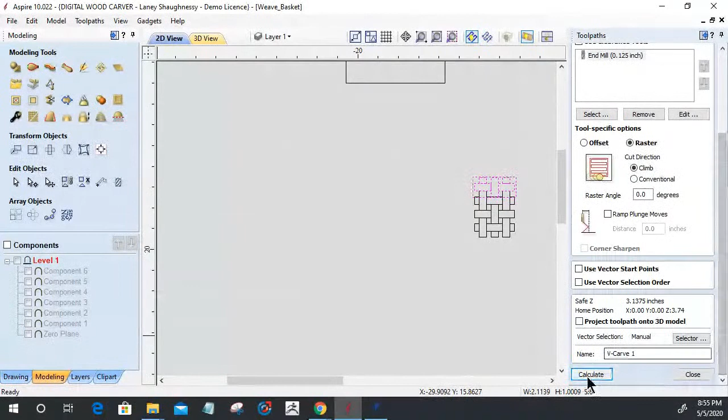It would help if we actually did that on the board. Hold on a second. Let's move to a new layer. Turn that layer off for a second, and let's bring it on the board there.

Now we can do something with that. Calculate that toolpath. Unwrap this. Are you not going to work with me here? Let's see here, between - bear with me, there's a method to this.

What? Let me do it as a profile toolpath.

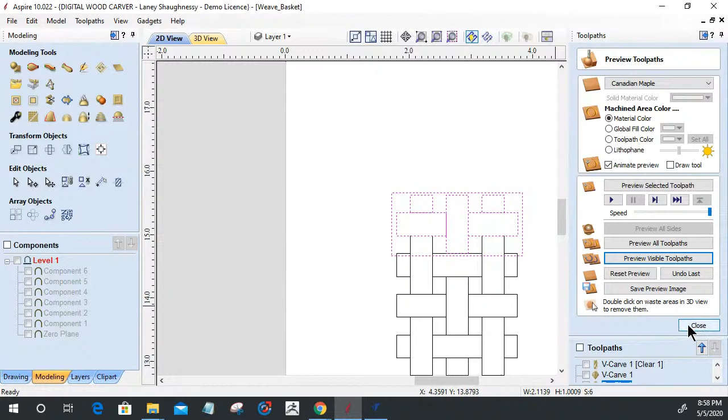Anyway, you could simulate kind of a weave pattern. I'm not doing it right. I think it's going to be a ball nose bit, not a V bit, but you could V carve a weave pattern. I might make that another class, so we're not wasting time on this. But in a 2D environment, you could create a faux weave if you had VCarve Pro. And I got to focus on that one. I wasn't prepared for that, and there's some thinking behind it. But it can be done. Anything can be done.

All right, let's turn this back on. Jesus, that was a successful showing of what not to do. All right, let's see here. We got to go into our job setup. We had an error. Our overall diameter exceeded our limit.

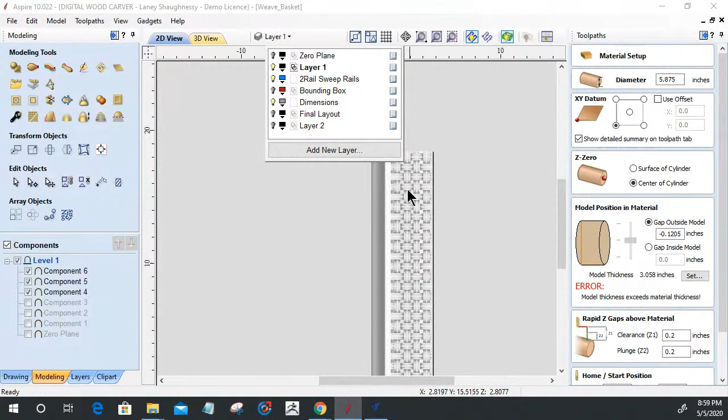And why did it exceed the limit? Because of the vectors, the weave. I didn't take into account the height of the weave, that eighth of an inch. I didn't subtract it from my profile that got swept, you know. So this guy right here.

So if I go into the properties here, I have my overall shape height of this guy. I should be able to subtract the eighth of an inch. It's actually going to be more than that - it's going to be a quarter of an inch, eighth of an inch on each side. Remember, it's wrapping. It equals... let that regenerate.

Let's... I'm not screwing up twice in a row. Let me see here.

3.058. Let me find out what my radius is. 5.875 divided by 2 equals... Okay, easy breezy. 3.0586. 3.0586 minus that equals... That's not what I want, but that's what I needed to reduce it by.

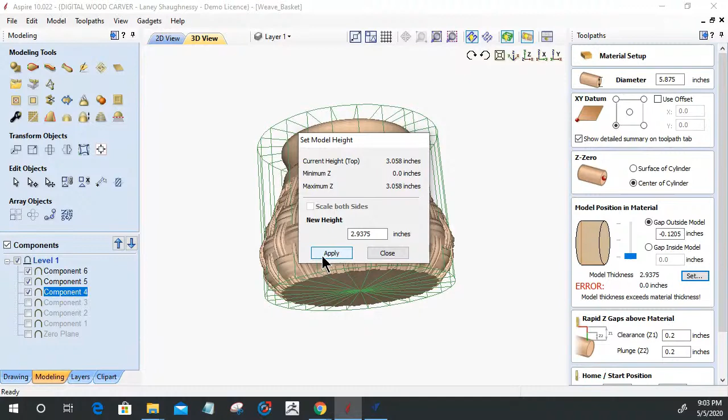Come on now. Regenerate, you son of a gun. Why you messing with me, man? 5 point... close.

Okay, sorry, I had to regroup. So I was trying to change the component height here, but I wasn't taking into effect... I was taking into effect the eighth of an inch, but there was more meat of what was underneath it. Under the weave, there's meat there, so it wasn't a true eighth of an inch. It was actually more, and then I had to go from there.

So it's easy for me to just click set here, take my diameter, divide it by 2 to get that radius, and size it to that radius so that it fits my whole diameter. So I went the long way around, couldn't get to it, so I ended up just taking the shortcut, which I should have done to begin with.

So I apologize, I wasn't taking into account - I was taking into account the eighth of an inch on both sides, which is a quarter, but I was not taking into account the meat where the underweave goes, and I don't know what that height is. So without doing a lot of poking and prodding with my mouse and finding that height, when we're in an unwrapped 2D view, if you look here at the bottom as you move over your mouse, you can kind of gauge what the height is, and it's a pain in the butt. So it would have been not conducive for me to do that. So what I ended up doing was taking my diameter divided by 2 and just rescaling the model to that height. Done and done.

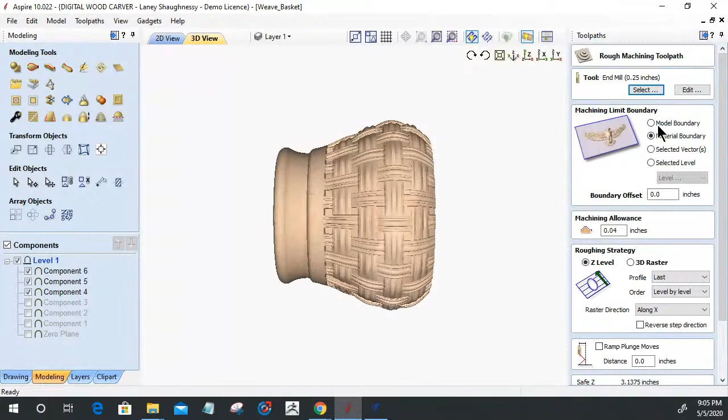3D rough cut using the material as the boundary. Use a quarter inch end mill. I'm going to have a 0.04 inch allowance, and I'm going to do Z level raster. Let's unwrap this and let's calculate the toolpath.

While that's calculating let's answer some questions. We haven't got to a question all night long. Let's see here, oh I did answer one - I answered Roger's question about whether this has a start time. That was a good one to answer. I think you guys were just having a good talk with yourselves about your states and stuff, so not a whole lot of questions. Mike did ask if anyone here does not have a fourth axis - I'm sure there's a lot of people, Mike, that might not have one.

Dennis Robinson, you're waiting to get yours hooked up - very good. As for the fourth axis, my plan was stop, get one. Oh okay, never mind, you guys are still talking to yourselves here. Hello Laney, looking forward to tonight's show. Hey Jim.

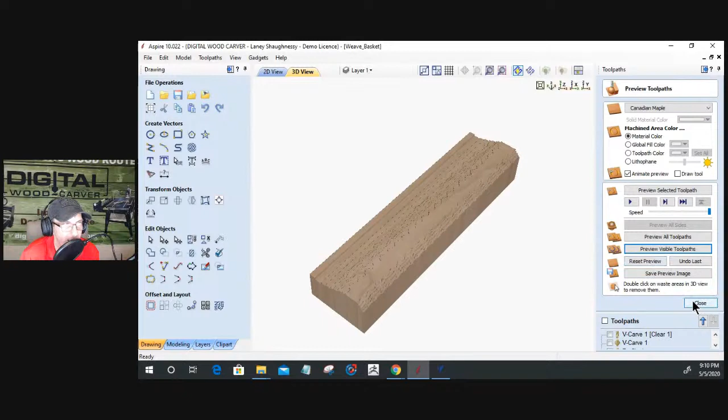So the rough cut is just going to hog away that waste material. Then we have a finishing toolpath using the model as a boundary. I'm not going to do an offset on that, and I designed this so I could do a 1/8 inch tapered ball nose and still get a pretty decent look on the weaves and everything, so I'm going to use that. If I don't think I'll get enough detail, I'll probably use a 16th inch tapered ball nose to try to get the detail out of it. But we're going to use the 1/8 inch tapered ball nose, and yeah, a raster.

Calculate that, let that calculate and go on any questions. Crystal, good to see you again - how you doing, how you doing, Crystal over at Calusa Cabinets. Am I saying that right? Calusa Cabinets. Yeah, nice on the spot design - very interested in trying to grasp it, it's new to me. Yeah Stephen.

Fourth axis - now you guys have your big ShopSabre, you and Crystal. I'm assuming if you had a rotary axis it would go on the table, so you'd be that example where your router's carving overhead and everything. Depending on the fourth axis kit you got, you could set it up to span across your X axis of your table, or that long Y axis, however you wanted. You'd just be wrapping your Y around your X or your X around your Y, depending on how you orientated that fourth axis on your table. You actually have multiple clamping options on that larger table and all.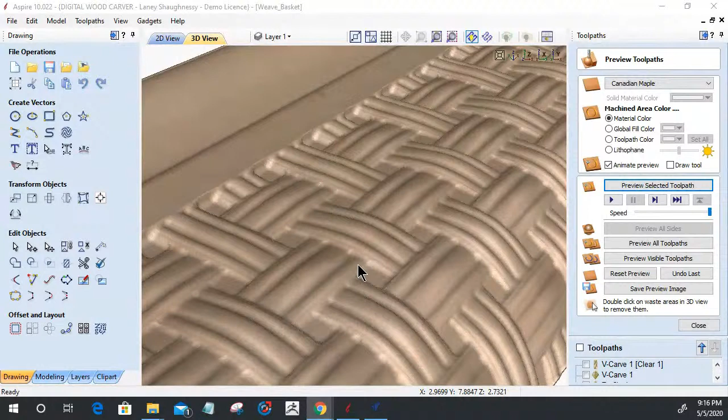In here, on the finish cut, in these areas, these radiuses here and here, I've got some tool marks. So I may be best served by using a 16th inch ball nose. Let's take a second and come in here and calculate this. Of course, I know I'm going to get better results with a smaller bit, it's just longer run times, double everything. We'll calculate that while we go over and ask some more questions.

Any questions right now regarding VCarve Pro and working with a rotary job? Doesn't have to be Aspire, it can be anything. That's why I was kind of jumping back and forth between the two projects.

By the way, when you're looking at the 3D view, your material setup, you've got to make sure when you're in a rotary, that little tan area, that's the model, right? You want the model on the outside of your cylinder, not on the inside. You want it on the outside of your cylinder so it forms appropriately. Okay, you want it on the outside. So let me regenerate this bad boy, get my zero plane in there, turn that on, so it wraps up. There we go.

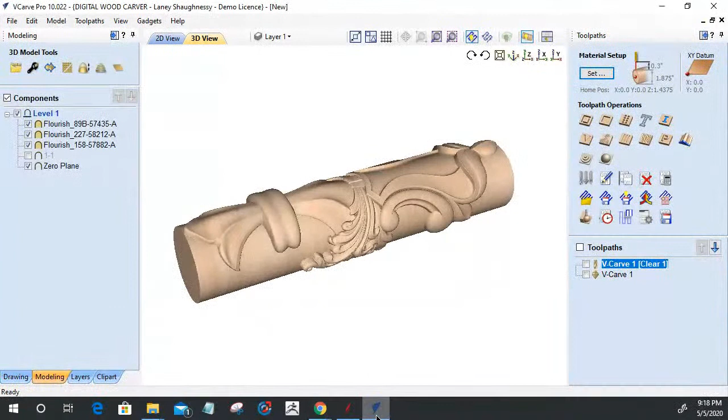Any questions on the roughing pass? Will the tool take a bigger bite on a piece of square stock when it gets to the corners? Yeah Stephen, but we haven't done the rounding toolpath yet. I'm letting this 16th inch bit finish calculating, and then we're going to talk about the rounding toolpath. As a matter of fact, we can actually talk about it now. So along with the 3D rough and 3D finish, we still got to do a rounding toolpath.

So we got to come up to gadgets, the wrapping gadget, and we got to do a rounding toolpath. Now, when we do a rounding toolpath, if you're starting off with a square blank, put in the size of the square blank. In my case, in this job, the little spindle was 2 inches.

If I was starting with an already rounded cylinder, then put in the diameter of that rounded blank. In my case, I'm starting with a 2-inch square blank. Now, when it comes to the rounding toolpath, I could do a radial rounding, around and around on that cylinder machining method. I could do a raster where it goes back and forth along my x-axis as that little head turns. Or I could do an optimized raster along the cylinder, which machines off the corners first. And since I'm working with a square blank, I want it to machine off the corners first.

And what happens is in that rounding toolpath, I'm going to use a 1/4 inch end mill or 1/2 inch or what have you. I like using bowl bits. I'll end up using a bowl bit to round off mine. But the bigger the diameter, the less time it takes to round things off.

But to answer Steven's question about, hey, will it take a bigger bite when it takes the corners off and all? Imagine, if you will, that we have our square blank here, and I'm going to go 2, comma 2, enter.

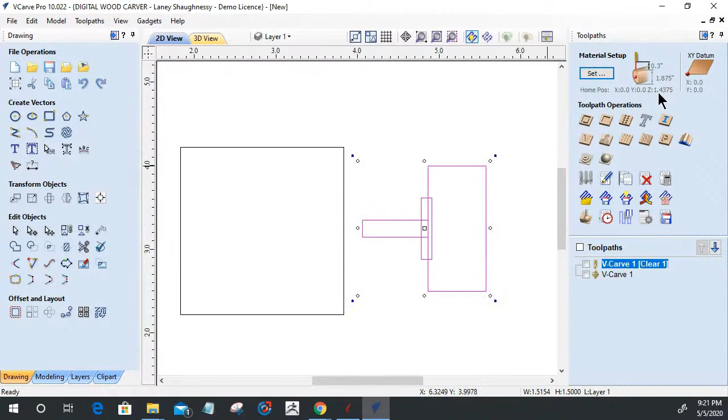So imagine if my 0 is the center of the stock, right? And so I'm zeroed out from center. And so my router has a safe distance that it's going to back away from that center, and in this case, it's 1.4375 inches. So let's say it backs up to that safe distance. Well, if it were carving right on this edge, when this part goes to rotate, man, it would be taking a big old bite on those corners and everything, right?

So what the optimized rounding toolpath does first is it rotates the part to that first corner, and the bit comes in and takes its normal pass depth, whatever it is, 1/8 of an inch, 16th of an inch, whatever you have your bit set for, and it knocks off that corner, and it will turn appropriately. Here, let's draw a circle in here.

1.875, 1.875, D for diameter. Okay. And so it will mill that corner, and then as it's taking its passes in, whatever it steps in, this piece is rotating just ever so slightly in these two directions. It'll run and clear off that, all the way until that corner is completely brought down to its diameter.

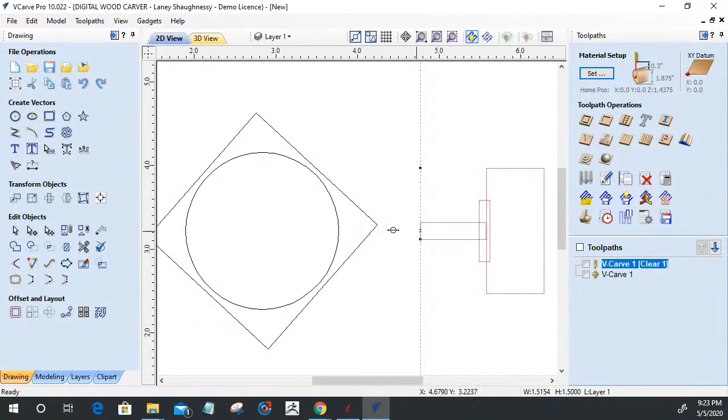Once it's done milling that corner, then it will take the part and rotate it to the next corner and do the same thing, then the next corner, and then the next corner. Once it's finished doing all the corners and getting them optimized off, then it's going to come in and do the actual rounding toolpath where that part is getting milled down round. So it takes the corners off first. With that rounding toolpath with the optimized corners, it's not going to take that big bite, Stephen, it's going to take normal bites. So that's the option, and when you're starting off with a square blank, that's the option you want to use.

Rodney says, I have a 1 inch ball nose never used. Would it be good for rounding? Sure, absolutely. The reason why I like bowl bits and ball noses is they're rounded. They have that radius. They're not flat, and so when it is taking a bit of a bite, it's not taking so much of one.

And when that bit is spinning, imagine, if you will. Let me back this up some. Imagine, if you will... oops, and the same kind of applies with a... oops, you son of a gun. Get over there. You oh, it's duh, it's grouped together. You can't trim a grouped object.

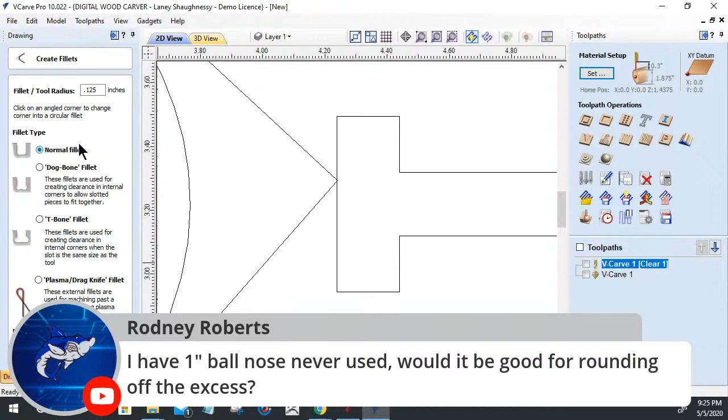All right, imagine we have a bowl bit - that's my interpretation of a bowl bit. When that bit is spinning, by being rounded here and not having such a straight edge, that point on the edge isn't digging into the upper level. It's got a nice gradual radius, so it's more of a scoop. Ball nose bits are the same way with their radius, so a 1 inch ball nose bit would do just fine for that.

I sometimes use quarter-inch end mills, but I do like using the bigger diameter bits. And if they have rounded edges, that's great. Bull nose bits are great for rounding and stuff.

Question. So if you were to leap before you look and buy the parts for a fourth axis, do you also have to spend $2,500 on Aspire in order to use it?

So first of all, Dean, if you have Vectric VCarve Pro, it's $1,300 to upgrade to Aspire. If you have Desktop, it's $1,625. So you wouldn't need to pay the full price of Aspire if you already own one of the two - you pay the upgrade price, the difference.

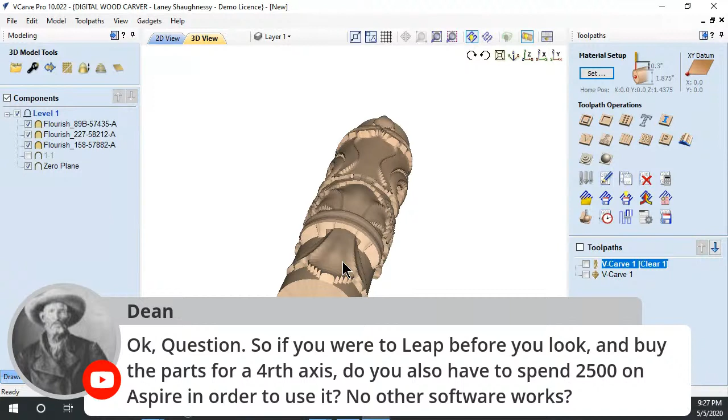Second of all, no, you do not need Aspire to use the fourth axis. That's why I'm in Pro right now demonstrating, creating these 3-axis models for your fourth axis. You can do it all in Pro, but you have to use existing models - you can't create from scratch. You wouldn't be able to create that weave pattern from scratch, but you can use the weaves in the clip art - they have different weaves and different sampling you can use.

But you can't create from scratch to do something like I was doing with the 2 rail sweep and the 1 rail sweep. Yes, you can use Desktop to create a rotary project - you don't need Aspire. Aspire just gives you the ability to do extra customizations and things.

And speaking of Aspire, let's pop back over here and look - it's still calculating. Oh God, based on that, using the 16th inch ball nose is not going to be the way to go for me. Holy cow, things take forever.

I saw that question. Let's see here.

Okay, that's a heck of a name for a river. Yeah, Cecil. I laugh every time I go down that way. It's beyond Yeehaw Junction. Once you get further south, the Native American names for the counties and towns are very pronounced because the Seminole Reservation is down there in Immokalee, outside of LaBelle. My cousin lives on the Indian reservation. My grandfather's mother, which would be my great grandmother, is full blood Seminole, and Paul Swamp Owl is his Indian name. He lives on the Indian reservation down there in Immokalee, and he wrestles alligators at Billy Swamp Safari - he's one of the gator handlers. Fun stuff.

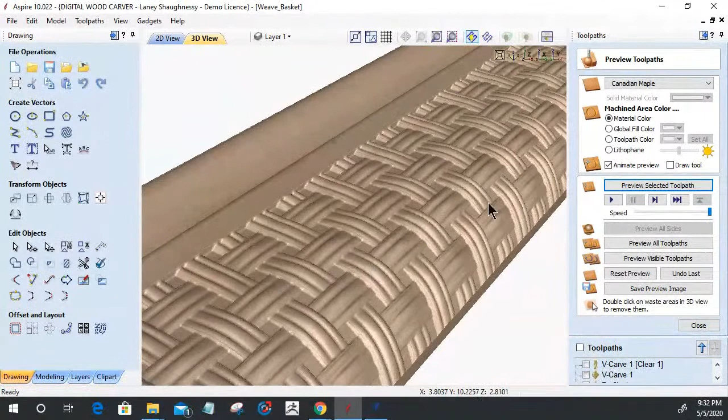Once this calculates, we'll talk about the run time. One thing I was telling Stephen in VCarve, and even in Aspire now, we still need to do a rounding toolpath. So wrapping, create a rounding toolpath. My stock diameter is going to be 6 inches by 6 inches. Going to do that optimized raster.

The one thing I'm kind of disappointed with is the way Vectric shows only certain tools by the type of tool they are. It's not showing my bowl bits now, only end mills and things. So I'll just go with a half inch end mill. I could cheat the system and create an end mill the same diameter as my bowl bit and just use the bowl bit in the router, but that's all right.

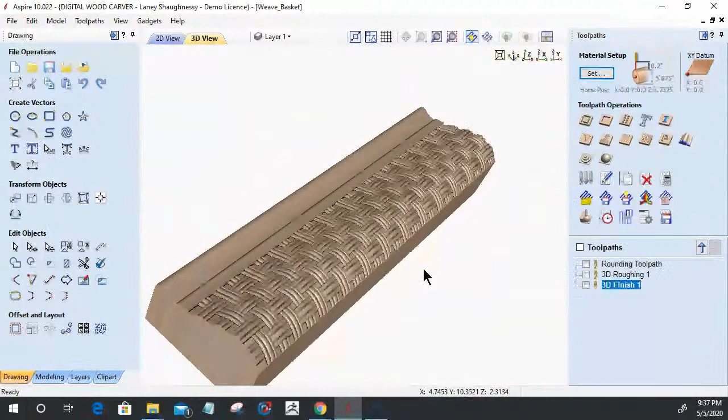All right, any questions about this project? Let's wrap it up so we got it in a final view there, and let's tilt this up this way.

Let it regenerate, just not that much. Let it regenerate, and that's going to be our little basket piece.

Off the CNC, I may use the CNC to get this to a certain point, then finish off the CNC. Imagine if I have a lathe with a 4-jaw chuck. I could take this off the lathe on the bottom base here. I'd take my little center hole, since I'm working with a spur drive and a live center, and use a decent sized Forstner bit to create a recess that my 4-jaw chuck can grab onto. Then I could use my hollowing tools to hollow out the center and make a vessel.

On my CNC, depending on the Z height and clearance, with a long reach bit—typically around 4 to 4.5 inches in length—I could set this on the table, and if I had that Z height, I could just hollow it out and pocket it out on the CNC table.

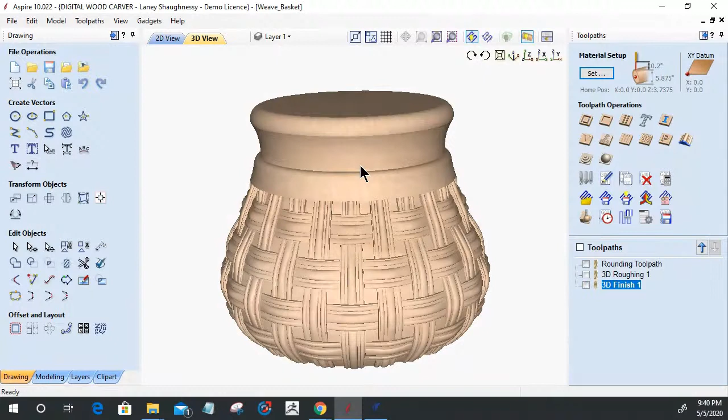And I could hollow this out and create a nice little cool vessel. There's a lot of ways to do it—the CNC can only get me so far, not everything has to be done on a CNC, and that's what we have other tools in the shop for. There are a lot of different methods: approach it by hand with a Dremel, Forstner bits, hole saws, whatever, to hog out that center part. Or throw it up on a lathe if you have hollowing tools and hollow it out that way.

I had a friend, one of my best friends here in Ocala. He and his wife just got married, and she loves turning. He wanted to get her a lathe. I had a lathe in my shop and my fourth axis—I use the fourth axis primarily for anything, and the only time I used my lathe was for turning pins and things like that. Knowing that, I told him, 'Kevin, here,' and just gave him my lathe, a Jet mini lathe. I gave him all the turning tools, my little Wolverine tool grinder and sharpener, and all that stuff, and set him and his new wife up. Man, she turned some cool stuff—they're having a blast with it.

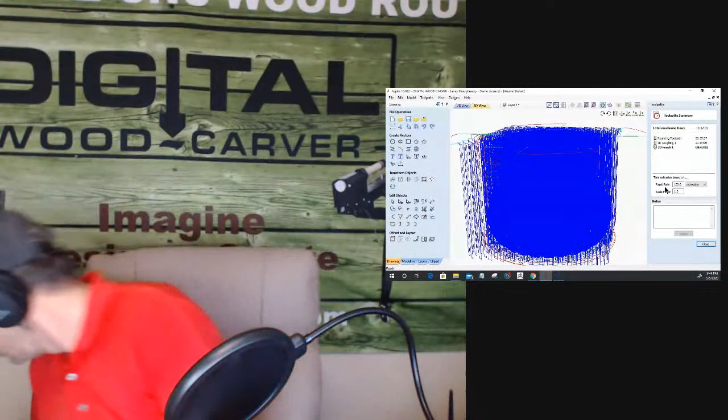But at the same time, you're not outrageous. If I, on this vessel, knowing what it is... hold on a second, I'm dropping stuff everywhere here. Knowing what it is, right? I don't know what it is. It's something, but it's gonna make a pretty bowl.

I think the weave pattern with that grain and all, it's a branch of something. I don't know, but that grain's going in all kinds of different directions. So it's gonna be kind of weird to see when it's finishing, it's gonna be fun trying to sand and finish that weave pattern and all. So I'm hoping that's why I'm thinking the 16th inch ball nose might be the way to go, so it's pretty much detail finished when it's done.

But a project like this, if I were running my normal machining runtime, which is around $30 an hour, just for the runtime we're at $300. Would that, if it turned out, and that's not counting if I hollow it out, finish it, none of that, that's just the carving of it, would it be worth $300 when it's all said and done?

I've seen things carved or sell for crazy amounts and all, and I'm usually conservative with my pricing. So I'm not the guy to ask, 'hey, how much should I price this for?' Because I'm low on my prices. But at the same time, who knows? It might be something unique enough to where, yeah, it is - it could be a cool little cookie jar or something.

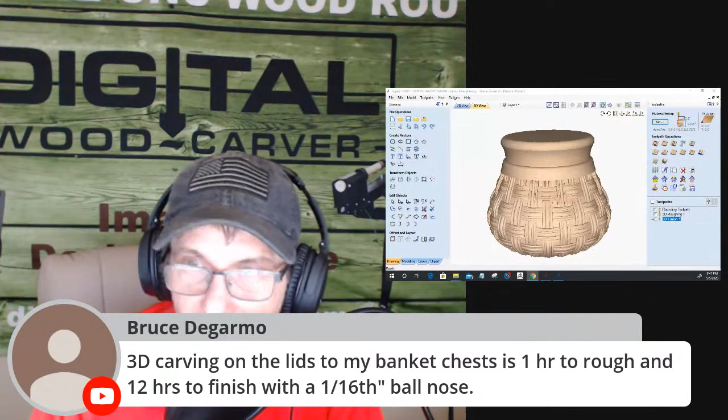I did a carving for the mayor of Ocala, who ordered a cabinet to be presented to the mayor of Kentucky at the Kentucky Derby. That cabinet had 3D carvings on the doors, raised panel doors, carvings all on the sides, and had the Ocala seal on it. It was filled with bottles of our Marion County's finest bourbon, and it was just a really ornate cabinet, with 3D carving all the way around and on all the parts. It was a 140-hour runtime.

So on that one cabinet, with all the detail and everything, it was just a straight run - let it cool down every once in a while, let it run. But yeah, that was the longest one I've ever run. 140-hour runtime for that project.

Let's see here. That is a labor of love.

Crystal thinks it's worth $300. There you go. Part of the Aspire clip art package.